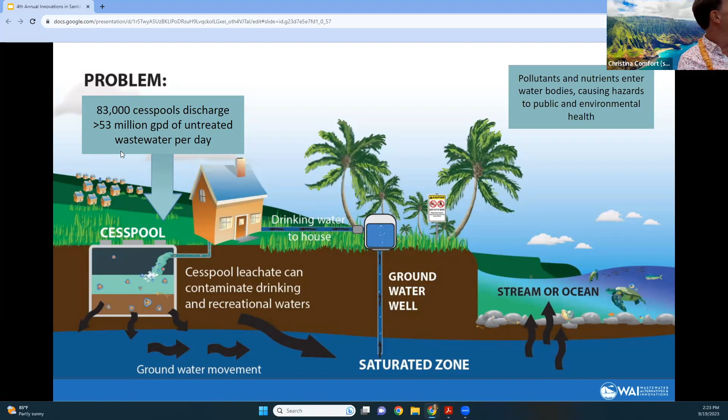I also want to thank Sina Pruder, head of the wastewater branch for Hawaii, and Ramzi Mansour, head of the Department of Environmental Management in Hawaii County on the Big Island, for being here today. We're just going to give a quick overview, I'll let Christina do this, of the priority areas and maps, so you know how pervasive this problem is.

Thanks, hi everyone. I'm just going to talk you through the cesspool ranking system on the 4 main islands. I'll show these different maps, and on each one you can see the outline of the island, with dots of different colors indicating where cesspools are located. Priority 1 is red, priority 2 is orange, and priority 3 is yellow.

These priority areas were determined based on a University of Hawaii study that included 14 different parameters, like environmental parameters, public use parameters, weather, and other factors. On Oahu, North Shore, Waimanalo on the southeast, and Waianae have some of the highest risk cesspool areas. Interestingly, even right here in Honolulu, where there's a sewer system, we have plenty of cesspools that still need to be converted.

In Kauai, there are about 14,300 cesspools, located all around the island in more rural areas. On the west side, Kekaha, Waimea, Wailua, Ha'ena, and Hanalei are the highest ranked in Kauai.

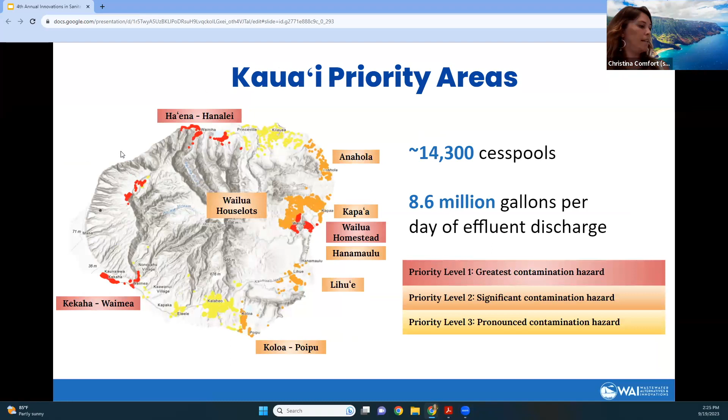In Hawaii Island, Puako, which some of you work directly in, many of you have heard about the sewage pollution issues there, those cesspools are ranked really highly. Also in Kailua Kona. Most of the Big Island is ranked as priority 3, but it's important to keep in mind that a lot of these cesspools are located really close to the coast and on volcanic rocks. So even if ranked priority 3, that doesn't mean they're not impacting the marine environment. Just based on the averaging, some really impactful and polluting cesspools might come out as priority 3.

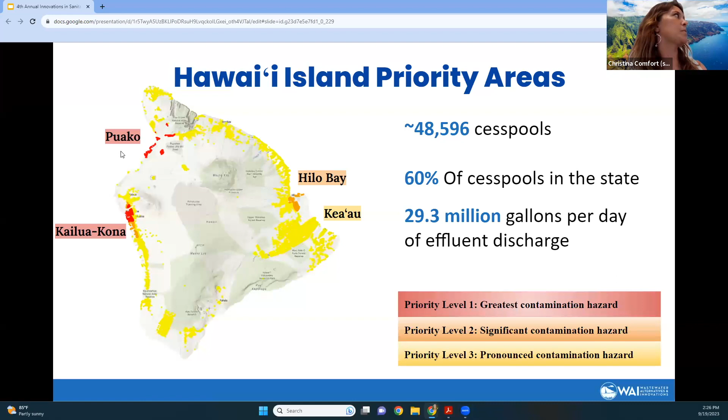And then for Maui, priority areas along West and South Maui are where most of the highest rated, or highest priority, cesspools are located.

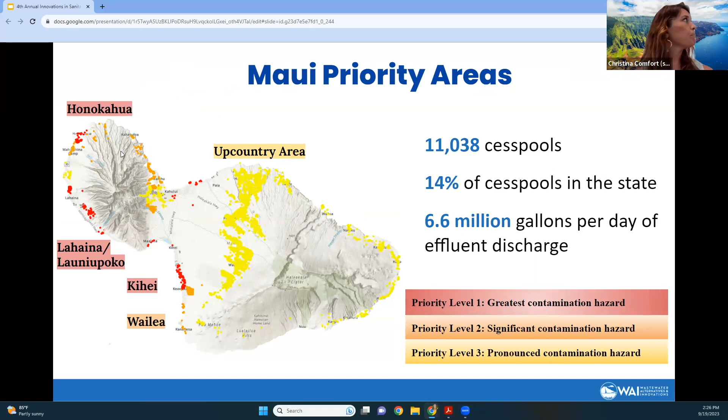Also, we don't want to forget about Molokai. It wasn't included in the analysis because it didn't have the same amount of data available to average out the cesspool priority and hazard risk. But just so you can see, these are where all the cesspools are located on Molokai, and you can imagine that most of those along the southern area, really close to the water, are going to have a high impact.

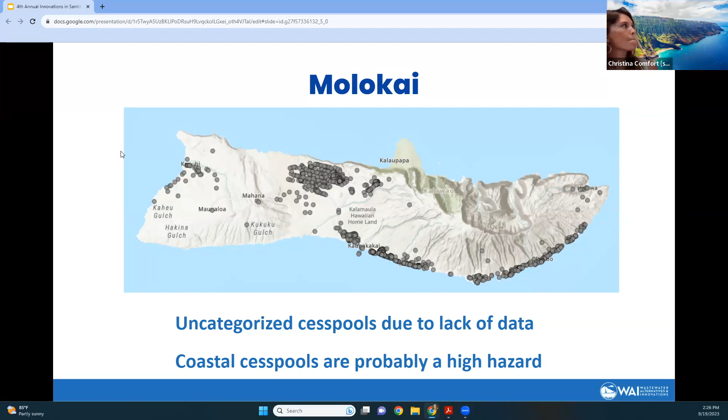As we move forward in our meeting today, I wanted to frame the conversation around the challenges and opportunities of wastewater management in Hawaii. On the challenges side, there's a lot to consider: environmental harm being done by cesspools, and in some areas septic systems, as well as aging sewer infrastructure.

The pollution from these systems can cause human health risks from encountering pathogens in nearshore water or, in some cases, drinking water. There are also low conversion rates currently, compared to our state mandate to convert all cesspools by 2050. Currently there's maybe 300 or so cesspools being converted per year, but to meet that mandate, that rate will have to increase about 10 times.

To move past that bottleneck, we need to think about the workforce bottleneck and the expense of conversions, and how this is all going to get financed, since a lot of homeowners can't afford the expense of these conversions. Finally, there's a need for better-than-septic solutions. It's become really apparent in other areas around the mainland that the standard septic system doesn't really do enough to reduce pollution, especially near a sensitive water body or coastal ecosystem.

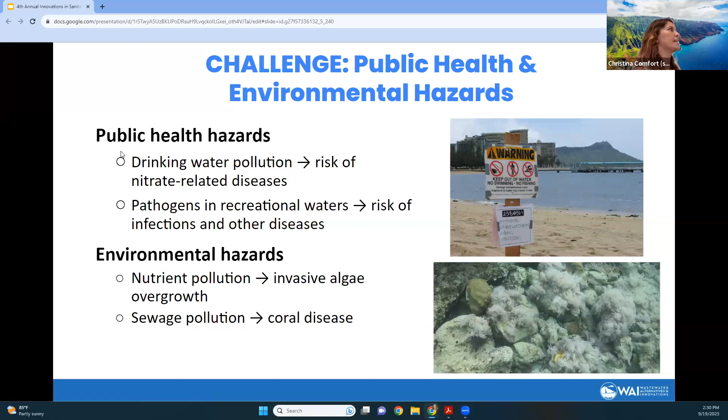But there's also environmental hazards, the nutrient pollution from poorly treated wastewater that's discharged into the groundwater can lead to invasive algae overgrowth on reefs. There's also all kinds of other things in sewage pollution besides nutrients that can be really harmful to corals. There's some evidence linking sewage pollution to coral disease increases as well.

So we're going to hear more about these environmental factors from our keynote speaker, Dr. Greg Asner, who's in the back. I'll let him share more about that towards the end, talking about West Hawaii reefs, climate change, wastewater pollution, and other important factors.

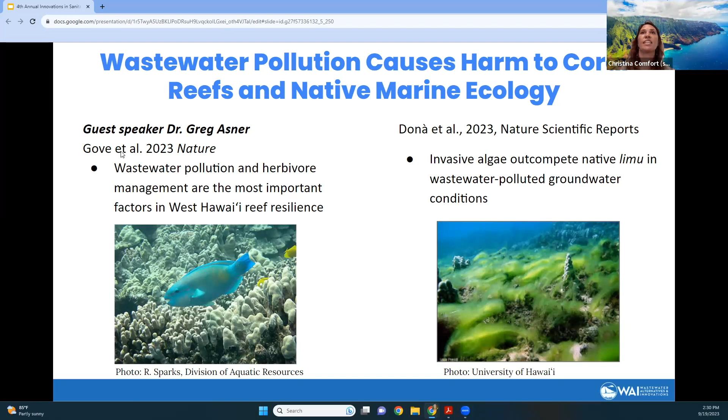I also wanted to share a new paper that came out recently showing how invasive algae versus native limu responds to wastewater-polluted groundwater. This paper showed that invasive algae really do better in wastewater pollution conditions than the native limu. So that's another important factor to consider.

On the cultural and recreational side, we have folks that engage in subsistence fishing, health of fish ponds, which are a brackish, enclosed environment really susceptible to land-based pollution impacts. Everyone who uses the water, swimmers, surfers, fishers, paddlers, a lot of us in this room, go out in the water. We want it to be clean. We want to be able to enjoy playing in the water, recreating, and fishing.

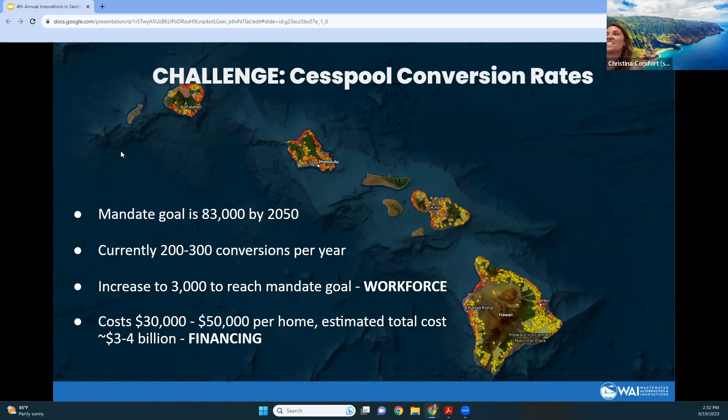We'll hear a little bit later from Gabby about the Workforce for Water program that's working on addressing the workforce development needed to make these conversions. And again, the financing is something that's a constant topic of conversation. Where's the money going to come from?

Septic systems don't adequately reduce pollution, especially when they're near sensitive water bodies. In areas with porous sandy soil or volcanic fractured rock, the effluent from septic systems in the leach field isn't treated to a very high standard, and it can quickly enter the groundwater and nearshore systems. So we're really interested in finding better-than-septic solutions and implementing those at the individual home scale.

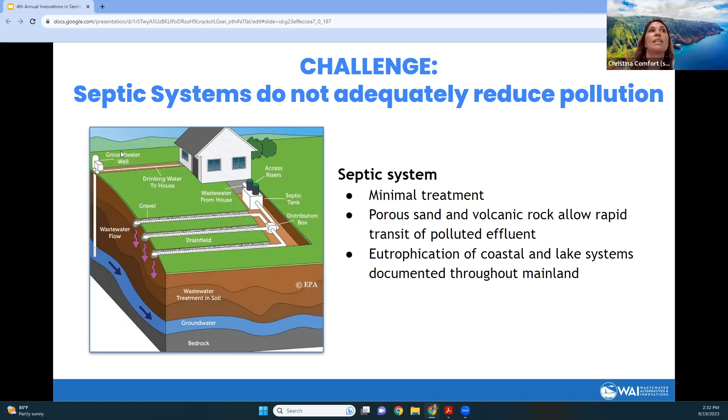This is some more detail about what a septic system does and does not do. Basically, septic systems do not remove all the nitrogen from wastewater, typically more in the 10 to 50% range, depending on what kind of soils surround the system. Whereas the technologies we're hoping to see implemented reduce nitrogen by at least 50%, and some of these technologies up to 80 or 90%. So that's really great.

So basically, there's a little bit of information here about the nitrification and denitrification processes that are needed to reduce nitrogen from wastewater into a harmless nitrogen gas. Septic systems don't do that. Some innovative technologies do, and that's what we're really hoping to bring to Hawaii.

And I'll pass it back over to Stuart to talk about legislative process. Thank you. So as you can see, we have made a lot of progress, and there are people in this room that I want to thank over the last really 7 years. Ted Bolin is the one who got me into this business about 13 years ago, so I have him to blame and thank at the same time. He was the Deputy Attorney General for the Department of Health.

Sina also has been working on these issues for years and years, and also served on the cesspool conversion working group with us. But we were able to pass Act 120 to ban new cesspools. We were the last state to do that by over 3.5 decades. And then we passed Act 125 to make sure that all of them are upgraded by 2050.

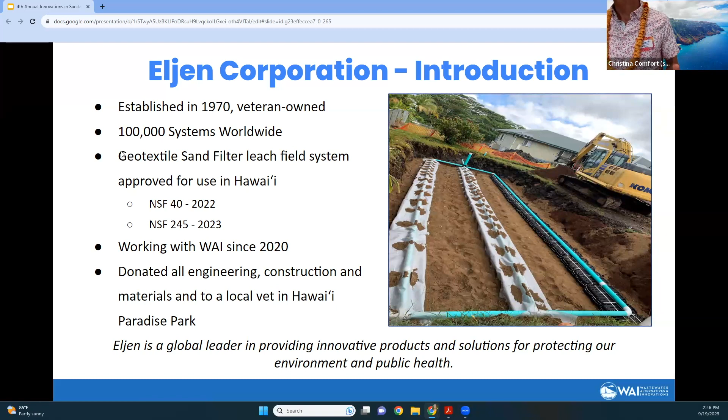So let's give a round of applause for Eljen and for Scott, who's going to talk to us more about the benefits of this system.

Right, Aaron? Straight out, yeah. It's on here too, it's pretty small. Should have brought my glasses in here with me. I'm gonna have to step to the side, I think.

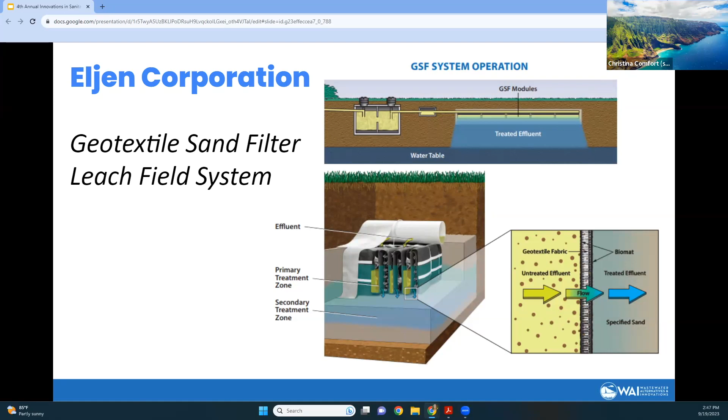There's a primary and secondary treatment -- see where the effluent enters at the top. Primary treatment in a standard system happens in your septic tank, but in the Eljen module, it takes place in the module itself. That's where we collect all the solids, and the sand polishes it off. When effluent passes through the module and 6 inches of sand, it looks like tap water and has no odor. By removing all the suspended solids, you won't clog the micro and macro pores in the native soil, which prolongs the long-term acceptance rate.

The primary treatment zone is made up of plastic cuspated core and non-woven geotextile fabric. The fabric is looped up and down over the core, as you can see in the picture -- it's one solid piece. In one A42 module, you have 65 square feet of fabric.

We use a specific sand -- ASTM C33, a washed concrete sand. It's washed because fine particles would otherwise work their way down through the coarser particles and clog the micro and macro pores in the native soil, slowing the effluent rate through the soil. The longer that soil stays wet, the more biomat builds up, and that's where you get a failure. So it's important to have that sand.

Even on stone and pipe systems, a lot of contractors complain that just trucking the stone, because it's vibrating, creates small particles -- fines -- that go down and clog the soil pores.

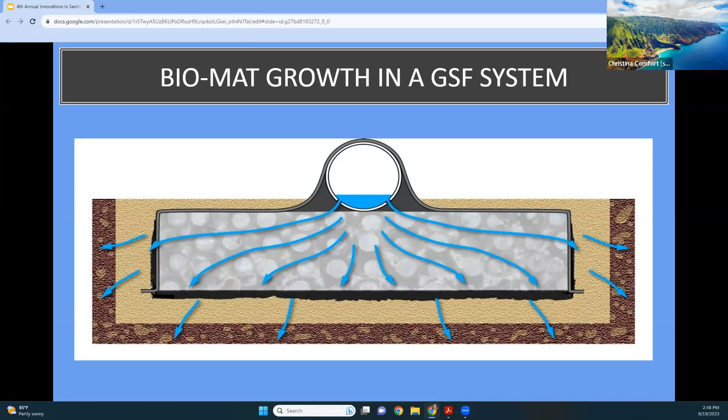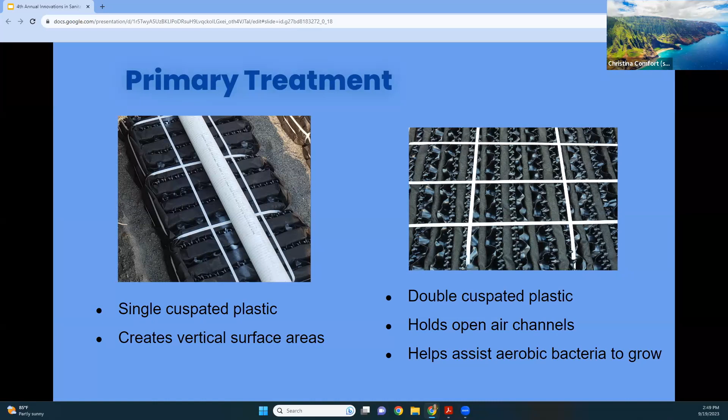Secondary treatment zone, I said, is the sand. Anything that makes it through the module is going to get caught up in the sand. We're going to grow some biomat. During our NSF 40 testing, we took the system apart, went and looked inside the sand. We had biomat buildup about 1/8 of an inch. We scraped that away, and underneath the sand looked pretty good.

NSF 40, we use 6 inches of sand below the module. NSF 245, which is at least 50% nitrogen reduction, is a little different. So our sand layer is now 18 inches, and our denitrification layer is 18 inches of sand and wood chip mixture. That's the lignocellulose material. So what happens is we need to have an anoxic zone in order to get denitrification.

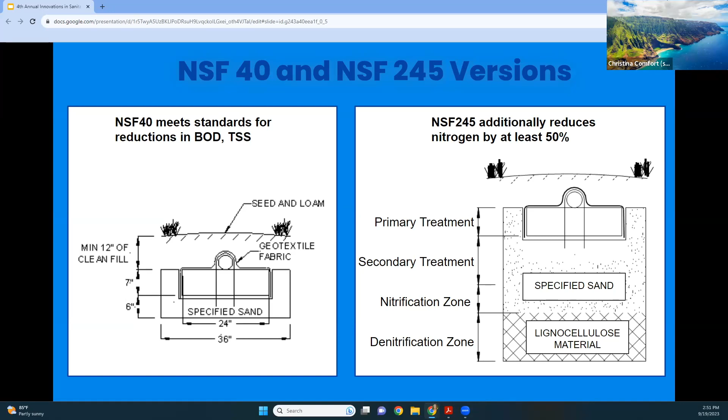Without getting too technical, you have the secondary treatment zone where you get your nitrification. You want to get 100% nitrification there. You need oxygen for that. But in order to get denitrification and have the nitrogen gas evaporate out, you can't have any oxygen. So that's why we go down to 18 inches there. That's the difference between those two systems. NSF 245 is a minimum of 50% denitrification.

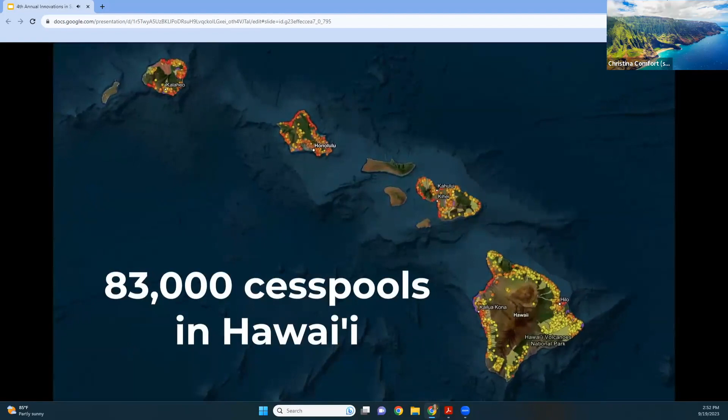My name is Stuart Poland, and I'm the co-founder and executive director of WAI, Wastewater Alternatives and Innovation. In Hawaiian culture, the word 'wai' is water, and in Hawaii, our water resources are threatened from contamination from cesspools and failing septic systems. The good news is that there are solutions.

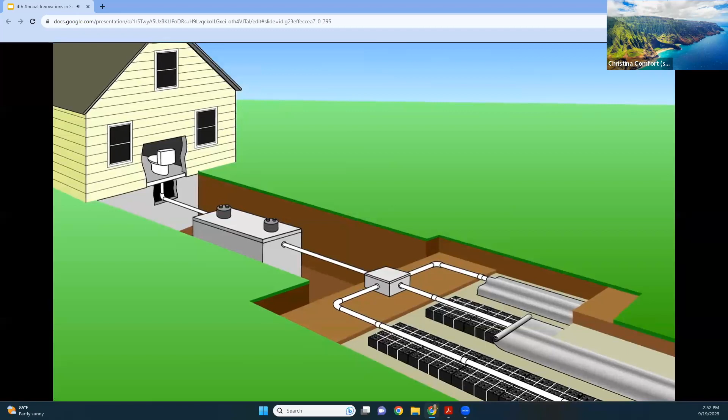The first step in converting your cesspool or failing septic system is to hire a wastewater engineer who will help design a replacement system. The engineer will design a septic system for your property, which includes a septic tank and a leach field that does denitrification, lowering the amount of nutrients like nitrogen and phosphorus that can contaminate coral reefs and hurt your business.

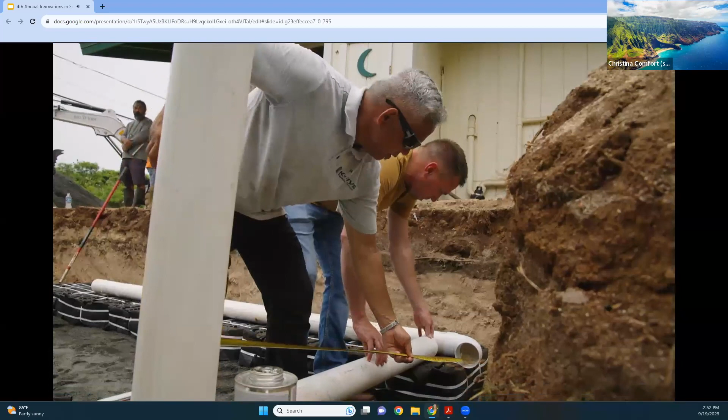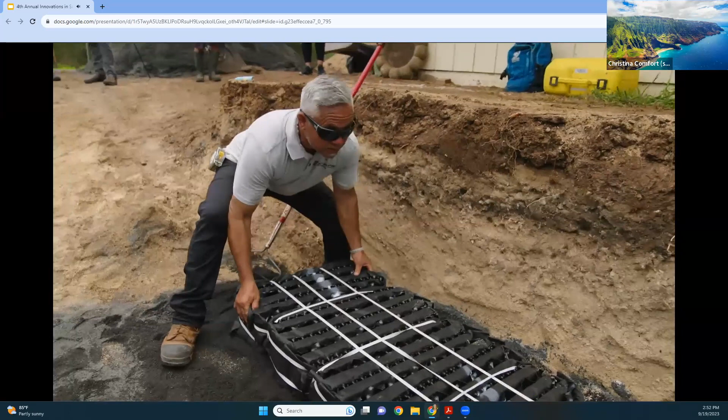The second step is to work with your engineer to find a contractor who can take out the old cesspool and put in a new septic system. The third step is to work with your engineer and the contractor to find the best system for your property, one that does denitrification. The homeowners here had a cesspool that had to be pumped out every single month at about $300 a pump. That adds up to about $3,600 a year.

And at that rate, they could have paid for the entire system in less than 10 years. Our corporation is proud of this continued relationship and partnership with WAI. WAI has helped not only our technology, but many technologies find a path into this great state of Hawaii. It is helping promote clean wastewater systems and removing cesspools.

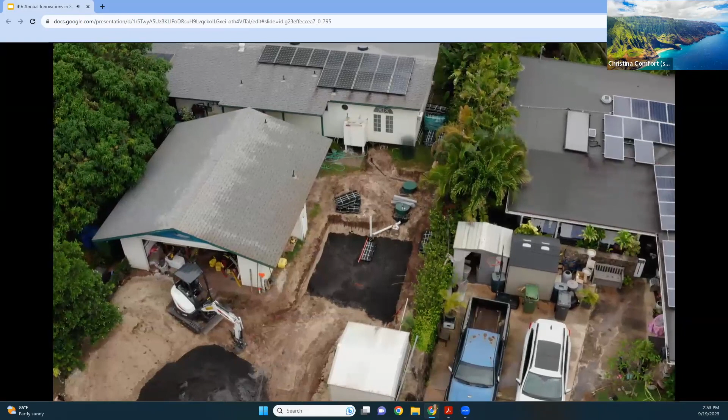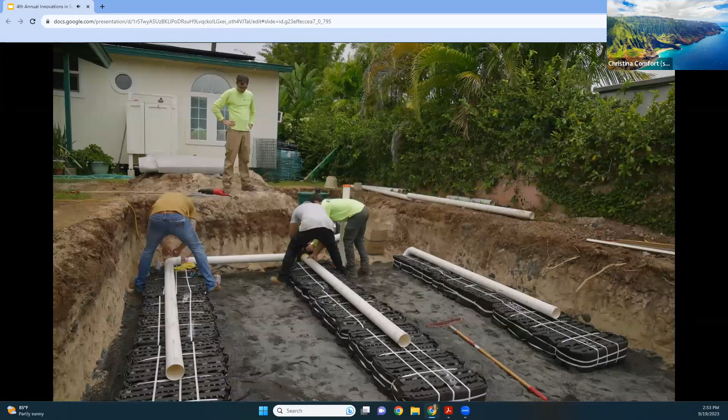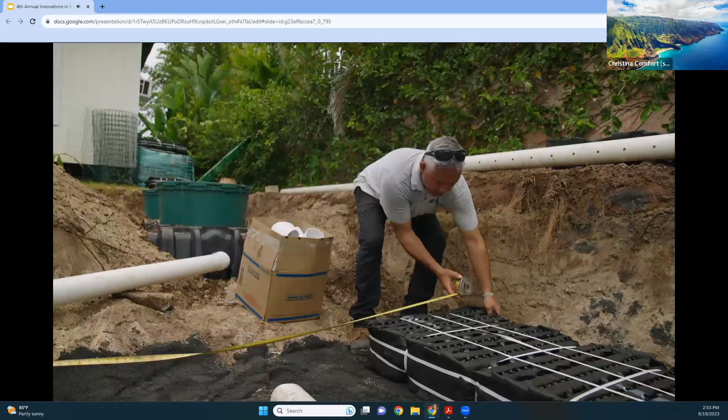It's passive, it doesn't require power, very little maintenance. It can replace aerobic treatment units in certain situations. We put out a product that's not just necessary for the environment, but cost effective. At half the size of the footprint, you can get into these residential homes and create a smaller leach field, which saves time and money for the homeowner.

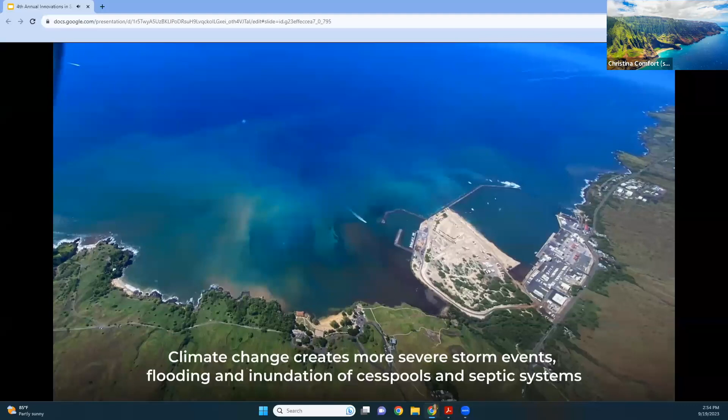Not only does Hawaii have the highest number of cesspools per capita in the country, but we were the last state to ban them, by more than 3.5 decades. But here's the good news: we have an opportunity right now, we're at a crossroads, to become a leader in sanitation across the country. And it is our job as stewards of the land and the ocean to protect our water quality and our water resources here. We don't have clean drinking water, nothing else really matters.

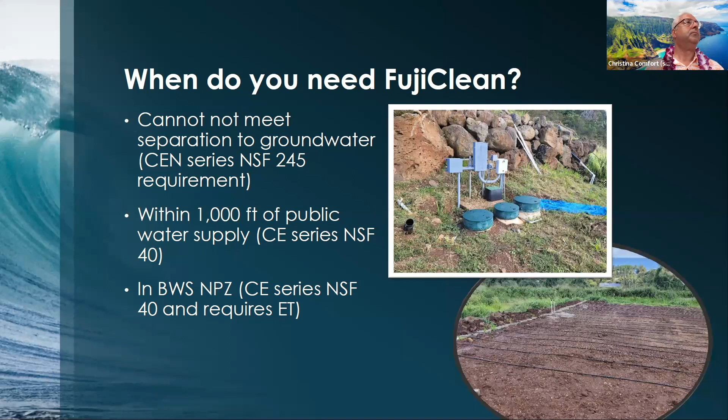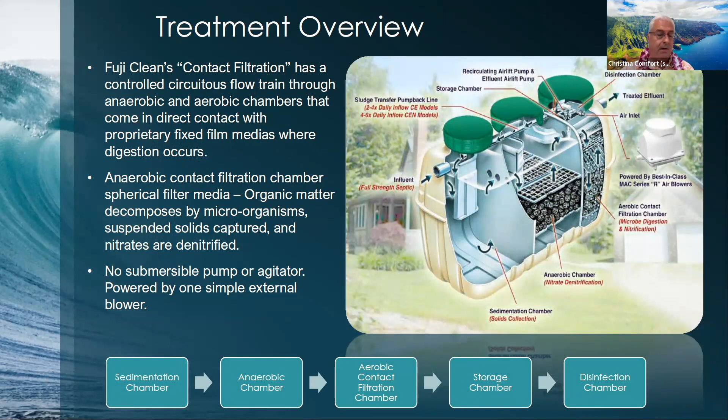These package plants basically have contact filtration. We go through an aerobic chamber, so we go through ammonification, nitrification, and denitrification. It's all the same chemistry similar to the Eljen, the biological process. So it goes through multiple chambers. It gets recirculated constantly throughout the day in order to accomplish that denitrification, which occurs in the anoxic zone, which is our middle chamber.

What's the average cost of your system compared to a traditional septic system? So our standard cost is going to depend a little bit on the size of the system and the quality of the soil and infiltration ability. I tell everyone we're basically anywhere from 10 to 15,000 incrementally different, and it's really just the difference in cost of the tank, because everything else is exactly the same. And then electric, we're very low draw. You can actually plug it into an outlet and be off and running.

We've got 1 minute left. Units have been deployed across the world. So since I've been involved with Fuji for the past 3.5 years, we're averaging 25 systems per year, so I'm just under 100 right now. And we're doing some commercial projects as well with our 6,000 gallon systems.

How fast can you produce large quantities? I met with Fuji, we flew out to Maine to our manufacturing facility. They can produce, I think, 8 a day in their manufacturing. So if we had a large scale project, we would set up an assembly facility here based on whatever is needed.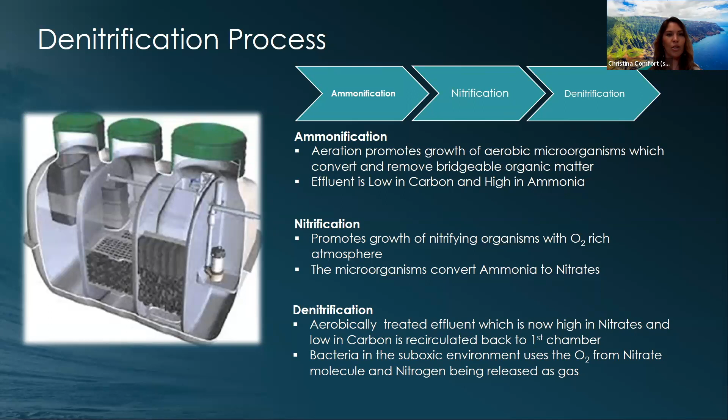Do you guys understand the difference between large capacity cesspools and regular cesspools? Most people do. Large capacity cesspools are usually affiliated with commercial businesses over 1,000 gallons per day, and they are regulated by the EPA. So when they came in to show you this conversion process, we're trying to convert cesspools. When the EPA came in with the large capacity cesspool regulations in 2005, they cracked the whip and were able to address thousands of large capacity cesspools, with fines to back it up. There are still a couple hundred large capacity cesspools across Hawaii.

What ASB did is they didn't realize one of their remote branches had a large capacity cesspool, and they were being fined for that. They were kind of like, we didn't even know it was there. The public can't use the restrooms, but if one customer uses it per year on an emergency basis, they said, okay, we'll have to convert this.

But what they did, and we hope this can be a model for the rest of the state, is they said, instead of us paying these fines and going back to the US government into the treasury where we don't know where that's going, can we use that money to help low-income homeowners convert their cesspools? And to the EPA's credit, they allowed it, and they went for it.

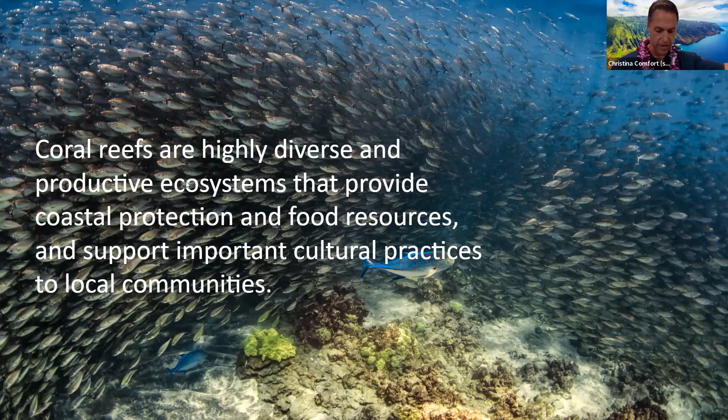The problems that we have are almost now becoming insurmountable in some areas on the Big Island. I will tell you from monitoring the entire state that there are areas we cannot address - they're just too far down the road. The Big Island is at what we call the land use transition, where the system is starting to teeter between sustainable and unsustainable conditions in certain spots. But we're not all the way there yet. So it's a very important place.

These are some of the drivers. 85% of people live within just a few miles of the ocean in Hawaii. Most human activities, development and infrastructure, are thus concentrated along shorelines, and land-based impacts - this is the punchline of the Nature paper - including runoff and wastewater and others that I'll mention to be holistic here, really are the most essential worries that we have as coral reef scientists.

I'm a coastal and coral reef scientist at a wastewater experts meeting. Kim beat me here by, I don't know, decades, but at least I'm here now.

This is that, and this is open access. We published it, paying the big bucks to publish it open access, so if I could put it on your website, you can do things with it. This is free to read.

The reason I put this up here is that it's critically important you understand this study covers only West Hawaii Island, and I'll talk about that in detail in a minute. The author list is pretty much the who's who of anyone working in this space. It was critical to us, and Jamie and Gareth are the real leaders here. I'm just the crusty guy in the background helping. But it was critical to the process to get the scientists on the same page to create an internationally high-ranking journal output that we all agreed on.

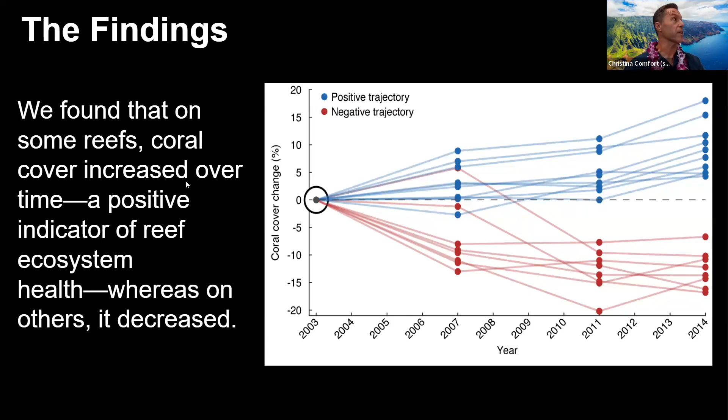But this was critical in our thinking: what is going on in these reefs? Why are some increasing in quality and some decreasing in quality prior to the first major climate event?

Jamie's team put together an amazing data set, compiled from a lot of the co-authors. It's field-calibrated, model-driven data. It's a complicated graph, but let me tour you through it a bit.

The first panel is West Hawaii Island, the area I'm talking about - 120 miles from Upolu Point in the north to Ka Lae, also known as South Point, in the south. The monitoring and this entire study focuses on that area, which is the largest contiguous tract of coral reef in the archipelago. It's the place that I know and love deeply - I know it like you know your favorite place on earth, and I still get choked up talking about it because it's such an incredible coastline. You may go to a resort, but you're seeing none of it. I get to work the entire region from the air and from sea, and it is absolutely epic, but also teetering in a lot of places along that coastline.

Now, what was mapped in this Nature paper, in this process? The second panel is human population, and you can see the yellows to the blues - the increase in human population largely centered around Kailua Kona, but zoomed way out. There are increases all over the place, and then different categories of what we thought about as possible reef stressors.

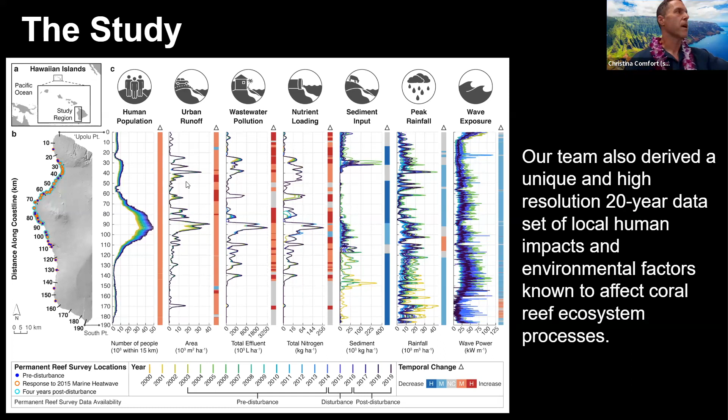Making a super long story short here, you have to read the paper—it's extremely detailed. This is kind of the pre-heat wave findings.

The graphic on the far right shows blue as increasing quality of the reefs, and red as decreasing quality of the reefs.

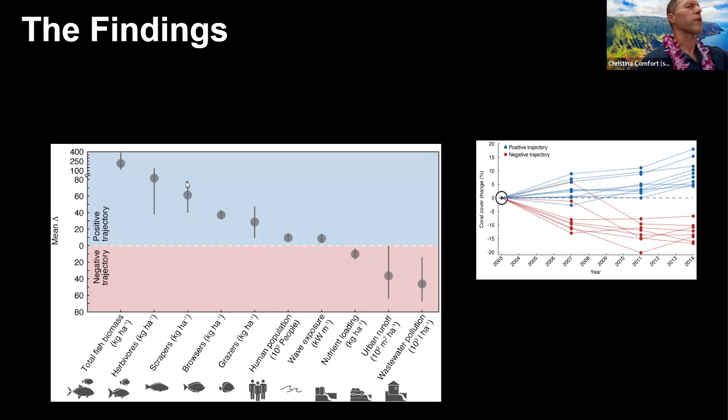Prior to the heat wave, with those model-driven data, we determined through statistical and geostatistical analysis that there were factors related to the improving reefs over time.

You can read them here. They largely had to do with fish management. Fish eat algae, and fish keep that substrate available for coral settlement.

I'm a coral settlement specialist, and yes, the corals do get very affected by how much macroalgae is on the seafloor. There is almost no more important factor than that.

Areas along the West Hawaii coastline that had high concentrations of different groups of fish that take care of this reef had improving reef over time.

Areas in red that had decreasing reef quality were geostatistically, highly significantly related to nutrient loading, urban runoff, and wastewater pollution.

This was the most sort of arresting set of results that we had in the process—arresting for all of us. We had been trying to figure this out, but the data were so clear this time that it came out in a very clear statistical sense.

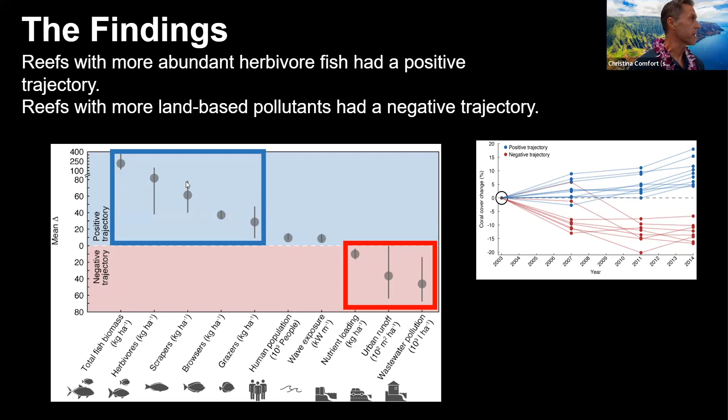I'll get back to that in a minute.

Then the data passed through the first heat wave, and you can read that for yourself. Ocean temperatures are increasing, marine heat waves are becoming more common, rainfall is decreasing, but the peaks are becoming more extreme when it rains and pours. In other words, there's Hawaii.

This is kind of the evolution of the heat wave in 2015. You see three hot bands in the Pacific. Who was here in 2015? It was really hot—I literally would see tourists jump in the water and jump back out, it's that hot, very literally.

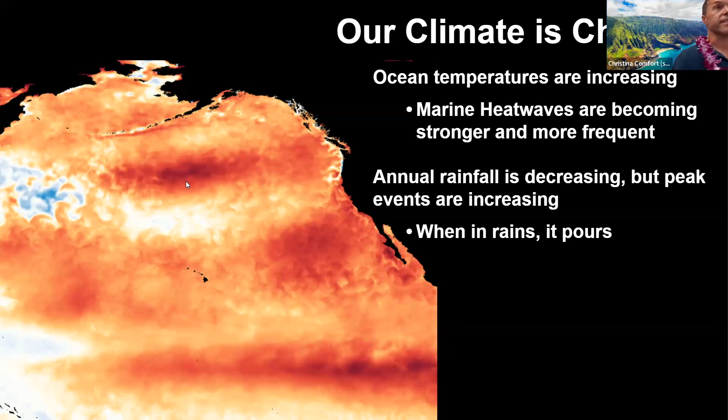Just so you know, since then we've had one other heat wave. It was about half as long, but actually a little hotter, in 2019. I was very involved in that, but I'm not talking about that today.

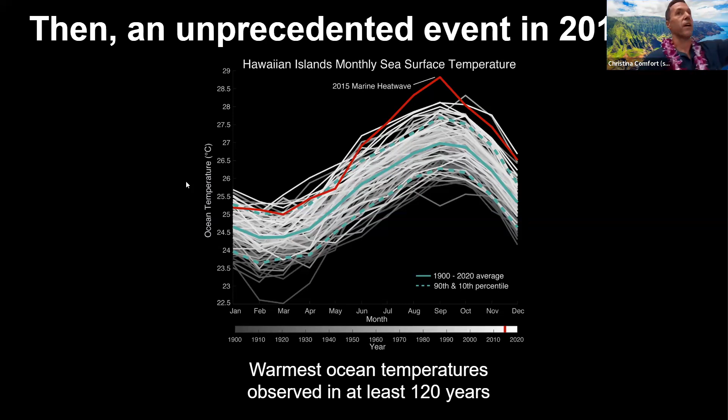It took corals out of their comfort zone too. At the time, we were talking about marine heat waves killing coral, and what we didn't think about was the compounding effects. That's what the next part of this story is about.

This is a little bit complicated—I'm a scientist, so bear with me. I think this is the end of the science part.

The reefs that we were monitoring through time had a certain amount of coral just before the heat wave hit, and that's shown here. This is 2014, 2015—these are all the reefs we're monitoring, and this is the coral cover at the moment just before the heat arrived. Some reefs were already low, some were very high in coral cover. There was just a lot of variability, right? And I told you all about that—wastewater, herbivore fish, that was all really important in leading up to this moment.

Then the heat wave came, and we had this crazy set of responses in these reefs. You can read it up there—max coral cover loss. We lost nearly 50% of our coral in some places. It is not true that we lost 50% of our coral overall.

People say the press titrates facts down to the minimum. But there were places where we lost half. A quarter of the reefs had 20% or more coral mortality.

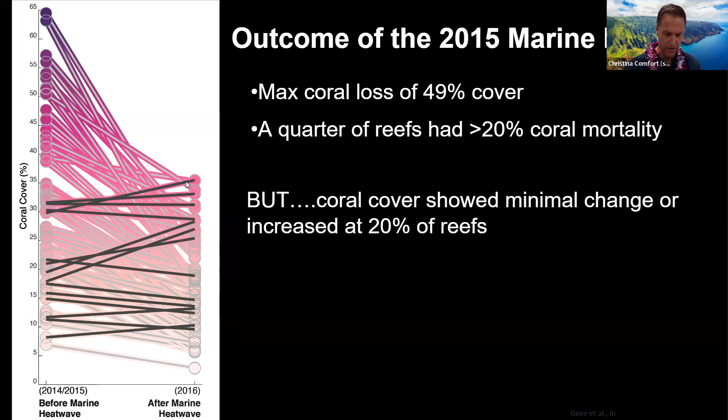But what was amazing is that about 20% of the reefs didn't decline or actually improved through the heat wave. So everyone, the authors, are scratching their heads trying to figure out what is it that caused that sort of positive response.

What we found, to make a long story short, is that reefs with the highest fish populations and the lowest levels of land-based pollution made it through the heat wave the best. I just summarized a massive amount of a complicated story. Kim has probably gone, how did he try to do that? All in one slide.

This is really detailed in the report. I don't want to bore you with the details, but honestly this was so enlightening for us. We said, wow, if we can keep our reef water clean and full of fish, we're going to be able to squeeze these reefs through these repeated heat waves.

The way I try to explain it to people is take an hourglass. Everyone know what an hourglass is? Turn it on its side, and now the hourglass is a pinch. We have got to clean up these waters, and we've got to keep these fish populations high to be grazing these reefs in order to get them through this pinch of these heat waves. That is the only way forward.

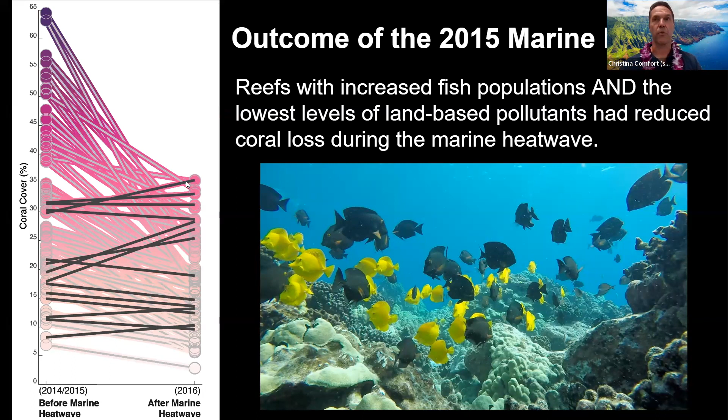That's what that says.

The response to this has been pretty great. On the DLNR side, that's the state agency that has jurisdiction over reefs. The Division of Aquatic Resources is within DLNR. If you're not from here, there's been campaign after campaign after effort to try to work with communities and the mentality of our fishing communities to try to increase our herbivore fishes on these reefs. I talked about why that's so important.

The grazing to battle down that algae is very important. So they've been doing their job. They're struggling to get it done because there's a lot of dissent over this, but it is a thing, and I wanted to be holistic in the presentation.

The need comes from this group. I cannot tell you how important we all think you all are, because those are the geospatial data sets that show us where our on-site sewage disposal systems, OSDS systems, are, and our field calibrated model-based effluent estimates. You see hotspots. It's not just where the cesspool conversion prioritization is. No way. That had Puako and Kailua Kona, but I live in South Kona and those hotspots down south.

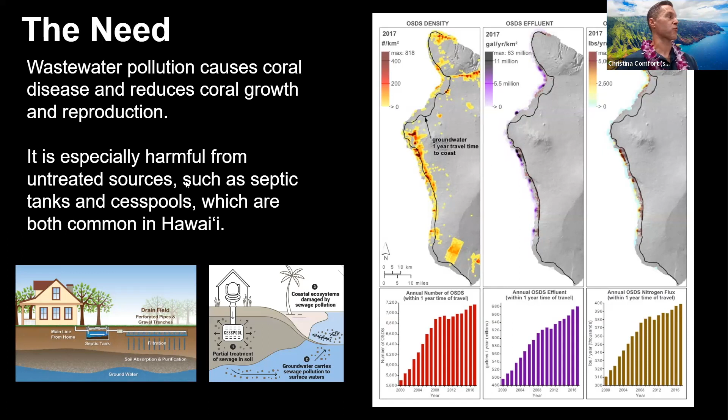Some of you visited me yesterday and you saw why. It's all cracked rock down there. There's no soil, hardcore down there, I think. And so I am a strong proponent of solutions to both cesspools and septic tanks.

I do want to take you home to my home, to a place that keeps me working every day 30 years later. I think I'm getting more energetic as I go, because the need is so great. The South Kona district in this red box of Hawaii County is a very special place because it's still environmentally quite epic, but it's got these issues as population continues to expand to the south.

If you travel through that area and wonder what's around you, it's a little hard to see from the back of the room. There are green areas of conservation land, but look how few of them touch the ocean. That big green wedge is state DLNR land. It doesn't touch the ocean, okay? A lot of it doesn't touch the ocean, and you can see all that stippling in there, associated with subdivisions and growth. So, yeah, we need wastewater treatment in the region.

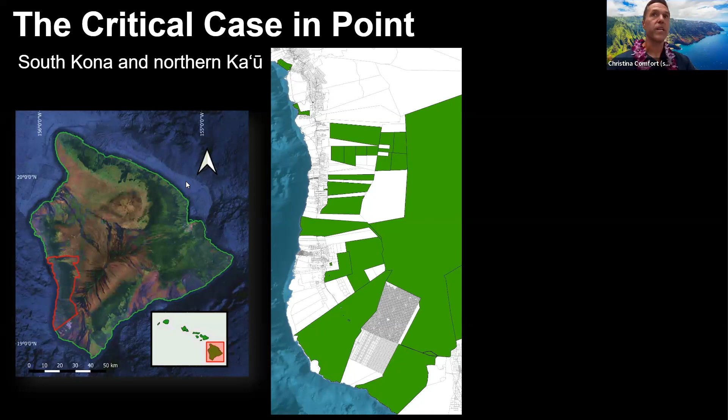What's really ironic is that the southern part of this district - in August 2022, Governor David Ige, the chair of DLNR, and everyone, after a decade of effort, finally put into place the state's largest marine managed area for the main islands: 19 miles of coastline. It's co-managed by Hawaiian cultural leaders and DLNR, called a CBSFA, Community-Based Subsistence Fishing Area. Terrible acronym, but it's the pathway forward for managing reefs because it allows communities to work with the government on effective management solutions that help our reefs, at least from a fishing point of view.

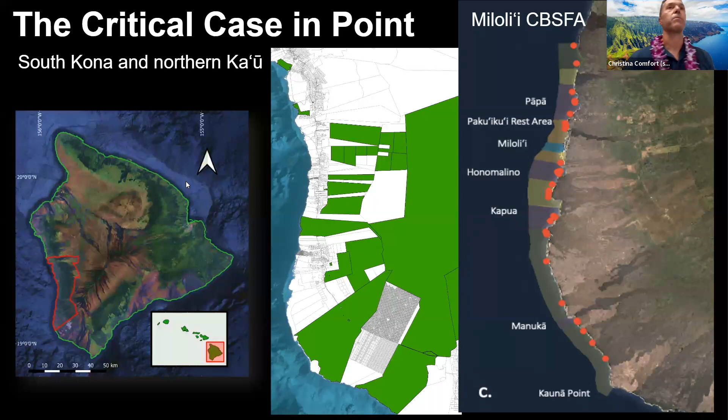Ironically, this is the area where there's an explosion of development. If you think South Kona is a rural place, you haven't lived my life—it's wildly developing. When I started, there were 3 languages spoken, and I'm publishing a whole history of South Kona right now. There are 13 languages spoken now. It's not the place you may have thought it was if you haven't been there in a while. It's really developing, and these issues are ironic because they're against a community-based subsistence fishing area of epic proportion that took a decade for our Hawaiian practitioners to establish.

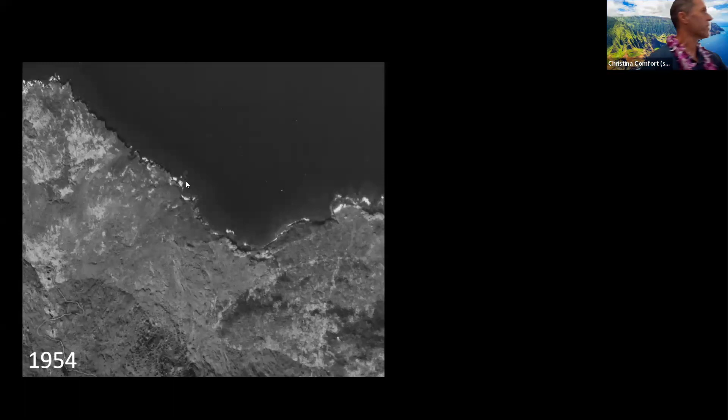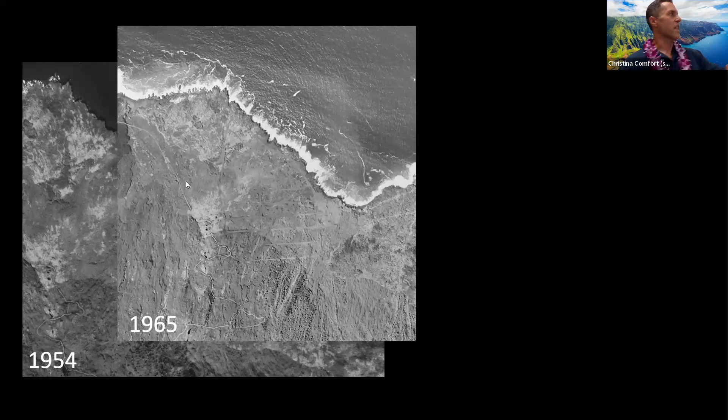Here's this place in 1954, before statehood—just before I was born. You can see this area that's near and dear to me; I'm using this as a case study. By '65, we had just become a state in '59, and all these subdivisions were put in. You see dirt roads in thermal imagery in '92, houses by 2001. Nowadays, my aircraft system uses AI-based methods for mapping in 3D where all the homes, sheds, and everything are routinely tracked. And there's that one subdivision.

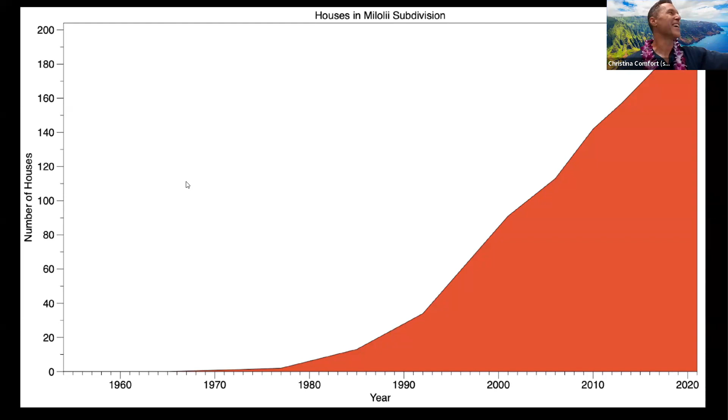That's what we can expect, and I'm not saying that's bad. I'm saying that's bad if the wastewater is not being treated properly. I'm all for the housing, but not with this flowing into the reef that just got the most important culturally based marine managed program behind it after a decade of effort.

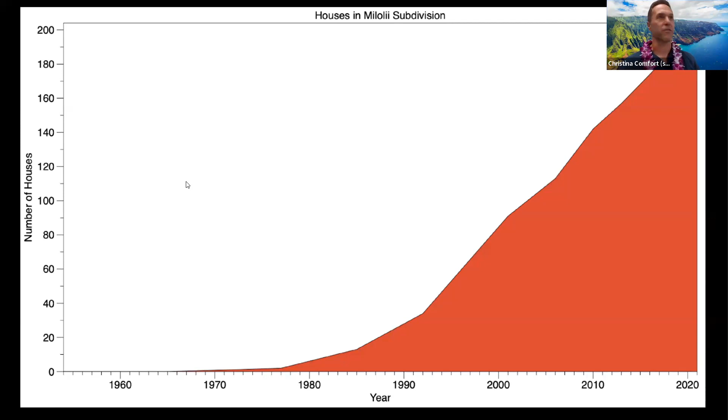So I think these are the issues. We're always saying that land-sea connections are deeply rooted in Hawaiian resource knowledge. That is true—I could start speaking to that, but I don't have time. The way our government is working, and I was talking to Ramsey, who I really like talking to because he's in the middle of this too, is: how do we get state, county, and other jurisdictions to work across these boundaries in a solution space that's going to benefit the people along this reef.

That's what that says. Our findings from the Nature paper, which I really did just gloss over because I'm between you guys and your happy hour and a few other times, are wicked clear, actionable, litigatable: these issues have to be addressed, both on the ocean side of management and on the coastal land side of management.

I'm going to end with this slide, and tell you what's been announced. I have committed $25 million to West Hawaii, already done myself. We're putting in this new program in West Hawaii. It's not just about planting coral—it's about changing how we're doing our work together between government, cultural leaders, community, and science. It's called Akoakoa, a name I learned through my cultural advisors where I live. It's got a dual meaning in the Hawaiian language: to assemble people, and for coral polyps to assemble on the seafloor as coral colonies. Literally, that is the word.

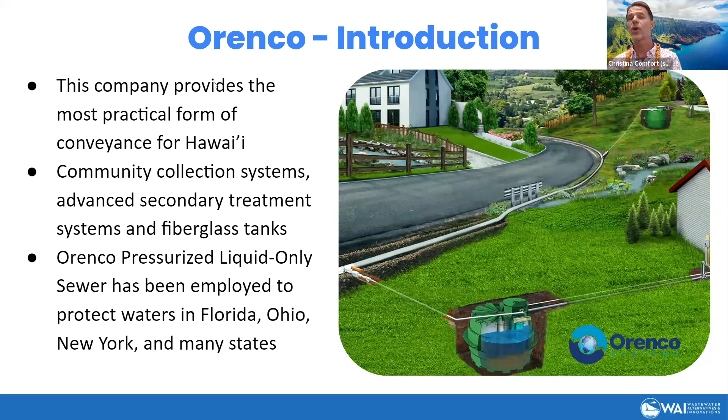So let's give a big round of applause to Mike Saunders, who has flown in from the East Coast and has had a lot going on. When we ask for studies, like we're going to look at this community, it's 6 hours ahead, it's at night, and Mike is churning out these reports for us in no time whatsoever. So we deeply appreciate all the work you guys and Bill have put into it. Jeff, the owner, was going to be here, but he got sick right before the trip and couldn't make it. But let's give a big round of applause for Mike.

Thank you, Stuart. So kind of interesting, Orenco water - one of the things people don't realize, because we get framed as this new technology or something that's just coming to being - kind of interesting fact, we've been around for 42 years, and we've grown from 2 founders that started a company in their garage to 460 employees today.

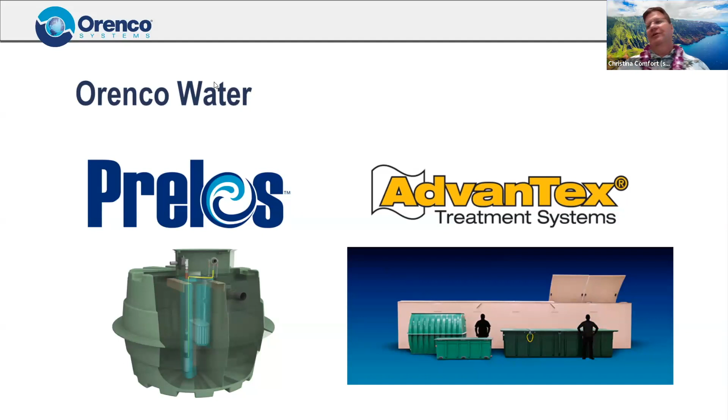What's interesting about Orenco, and why I like it, as Stuart said, we're a 2nd-generation family company. We're going to talk about products like Prelos and Advantex today, but we're a solution-based company. Most of our people are engineers. It's kind of funny - the products all came by default, and really our core value is clean water and trying to find solutions. So it's an interesting place to work. We're based in Southern Oregon, but we sell our products nationally and internationally. We have a large presence in New Zealand, Australia, Greece, and other places. Really what we're known for is scalable solutions. Hopefully you see that today.

You've heard the word decentralized already, so I'll explain that a little bit and how we fit into that. We are the industry leader - we were doing decentralized, I think, before we knew it was decentralized and before the name came out. You also hear it called distributed. But anyway, that's what we'll talk about. What we've tried to focus on is passive scalable solutions - low energy, low operator oversight is really our theme. We do everything all the way from a single family home up through complete community solutions. The other thing we call 'one-offs' - stuff that's off the grid that needs a more advanced treatment solution. I really think we're the only company that scales like that, so you'll probably see that in a second. And you've heard clusters talked about - I'll explain that, and decentralized.

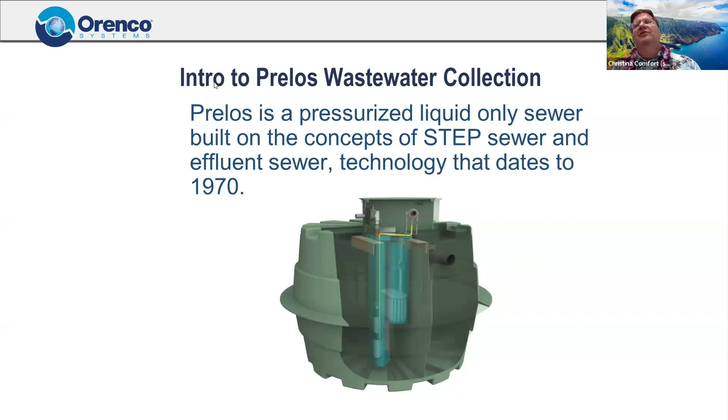So Prelos, it's kind of interesting - we've been doing this since the early 80s. The technology existed since the 70s in Florida. We did not call it Prelos till about 4 or 5 years ago. So this gets a little confusing - you'll hear it referred to as STEP, septic tank effluent pump systems. At Orenco, we started to cringe when we hear the word STEP because people hear septic tank and get the wrong idea. So for years we called it effluent sewer, and more recently we call it liquid-only sewer. That's where Prelos came to being - it's pressurized liquid-only sewer. So that's the logic behind the name.

The concept's pretty simple, and actually everything we do at Orenco is based on this concept: we intercept the flow basically at the source. Unfortunately, here's where the name septic tank comes into place - we do what a septic tank does, we just do it in a more robust fashion. If we intercept that flow and keep the wastewater there long enough, we get free primary treatment - solids settle to the bottom of the tank, scum goes to the top, and we take the wastewater from the middle and take it somewhere else. We can provide that treatment local to that tank, in a cluster at a community system, or send it to a centralized plant. We can do all kinds of stuff with it because without solids in it, it's easier to treat and easier to move.

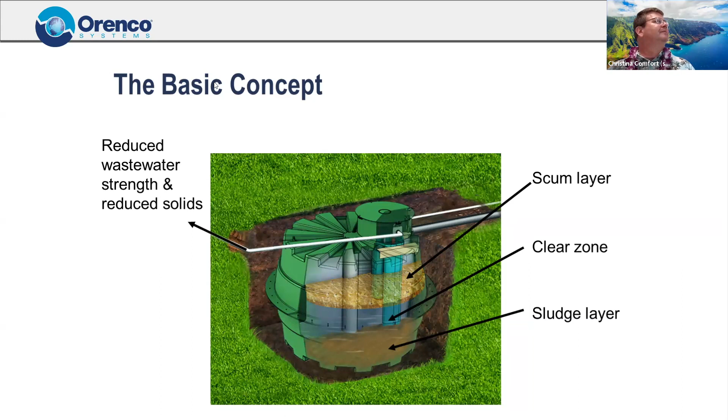So when we put it in a collection system, what you'll see here is it's discharging from this unit at the property and going out to a small diameter pressure main. When we try to apply this in the real world, this is the biggest factor. When you think about wastewater treatment, most people are familiar with lift stations, gravity sewer, deep pipes and manholes. Typically, this pipe is a 2-inch diameter pipe and shallow bury.

When we get asked, well, how deep is it? Usually we put it about 3 feet deep just to protect it. But the reality is in Hawaii, that's probably not even practical. So we can shallow it up, and if we need to, we can armor it. Really, if you're in rock and you just want to put it a foot down, you put it a foot down and probably armor it with some concrete and you're good to go.

The other thing that's really interesting about this is because the solids are at the source, this behaves like a water main. That means that we can flow in any direction. We can flow huge distances, and we have systems going 10 miles to an existing treatment plant. It sounds a little oddball, but the service line, if we had to go up walls and along walls, we can do that. Again, there's no solids to settle and collect anywhere. So this is the power of this.

We joke about it, we actually have one of our slogans, the power of Prelos. It's because we don't have solids to move, and it just makes it really easy. I can have treatment behind the fence there in that location. I could have another treatment plant five miles down the road, and they can be interconnected. I can pull off and reuse it there. I can go the other direction if I need to for part of it. It's kind of cool.

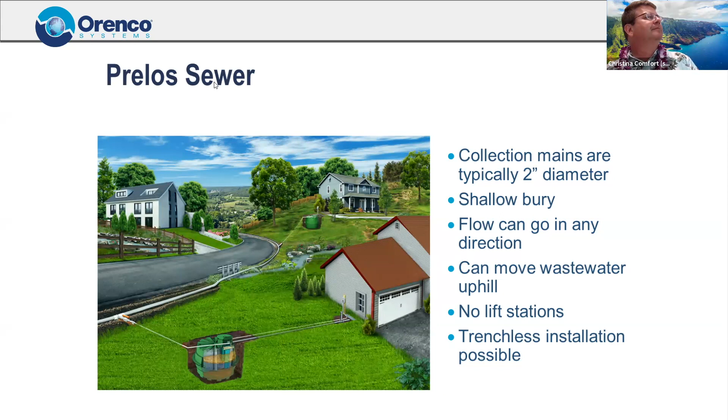Really the concept would be is where there's a cesspool, we would install this next to the cesspool. And like I said, that discharge line from there, if it has to go up a wall and along a wall, it can. Basically manifold them all together and take them somewhere off property to treat. So we're talking about the difficulty sometimes of disposing on property. You don't have space to do a drain field. You may be too close to the ocean. Well, this thing's pretty powerful. We can move it miles from the ocean if we have to, if that makes sense.

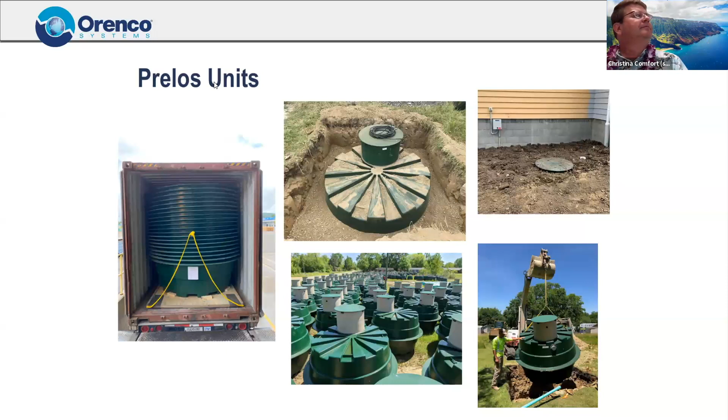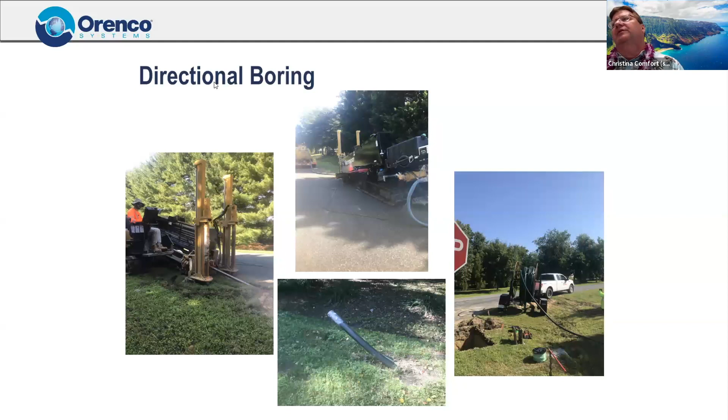The other thing is kind of slick. Obviously, rock will be a little challenging, but if you haven't seen directional boring, I describe it as basically boring a well horizontally. You can steer it up, down, around. What's neat about that is we can avoid soil disturbance too. So another added benefit of this type of approach.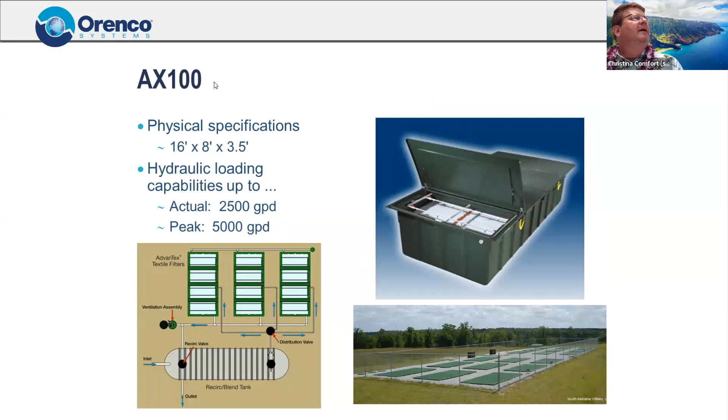These are 2,500 gallon pods. A bigger version is a 7,500 gallon pod. The key here is simplicity again. It's a very passive, natural process, kind of built on the concept of a sand filter. All it has is pumps. There's no headworks, there's no open tanks. It can be built above ground. Again, you can see the concept that we have as many pods as we need to get to our capacity in that upper right-hand side.

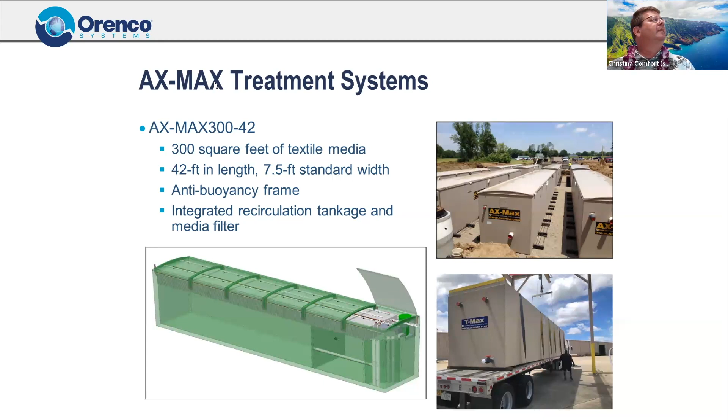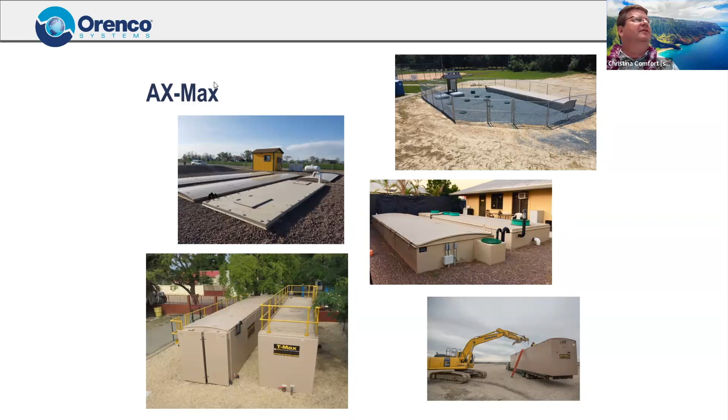I know there were numbers floated around of $100,000 to $300,000 to put in conventional sewers. Well, a 2-inch pipe costs about $3 to $4 a foot, plus whatever the cost is to install it. Still big numbers - I saw numbers of $100 to $120 to directional bore - but nonetheless, a lot cheaper than conventional types.

The nice thing too is that unit I talked about, the Prelos unit, that's a deferred cost till you actually connect somebody. So you can plan these, phase them a little differently. You can take hotspots offline first, if you know there's a lot of cesspools, and maybe not take other areas off service. You can also bring in on-site systems that mirror the same technology - if it doesn't make sense to run lines now, you can do that approach later and then run lines later. If I want to eventually tie in other treatments, I can add more homes and add another decentralized plant. So there's this decentralized or distributed approach.

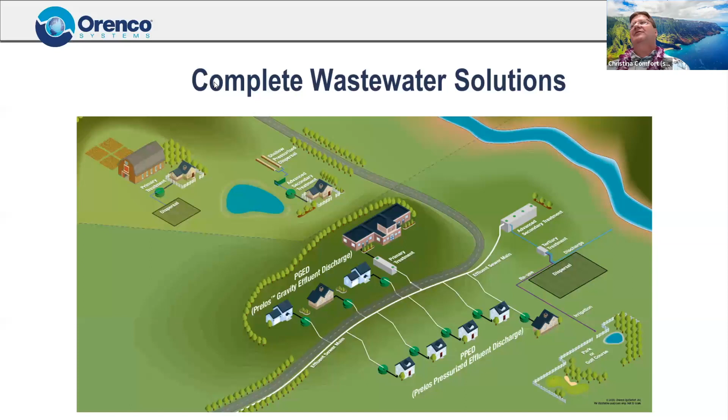So we went out to Milolii yesterday. This is kind of an interesting system for us, and I will say it's really been interesting going around the various communities, because we're a solutions company - every time we look at something, we really see the challenge in it.

Obviously the things that jump out at you there are the topography - it's 1,200 feet from bottom to top. The right-of-ways are pretty tight. The other thing that's really striking is that the build-out density is relatively low and spread out. Then you start thinking, well, where do I put treatment? Should it be at the bottom of the hill? Disposal - you run downhill, you're getting close to the ocean. As we were driving out, we noticed there was a lot of agriculture actually at the top.

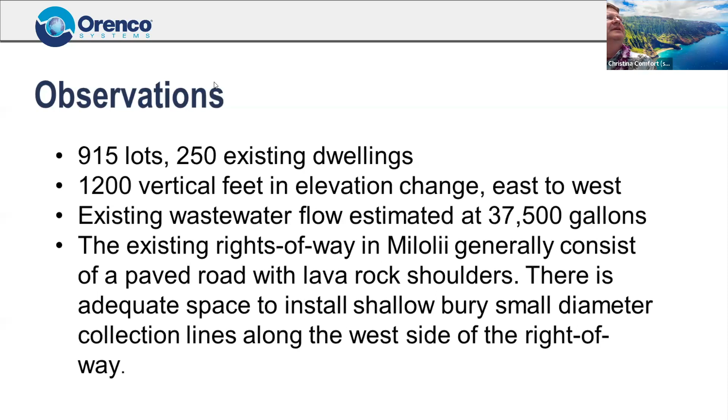We were kind of going, this may make sense to bring it up the hill - if the ag industry can use it up there and put it on some trees, maybe that makes some sense. So the big takeaway here is, well, what does this look like? It's about 915 lots, 250 existing dwellings, and as I said, it's got some challenges with it.

If you want to put the treatment plant at the bottom, hydraulically we can do that, and it would actually be mostly gravity at the bottom. We're also toying with the concept of maybe going uphill and having distributed treatment plants going up the hill. We talked about fire protection - we could actually stagger tanks going up the hill instead of just disposing of the treated water, put it into tanks so there's a supply for fire protection at various points going up the hill. Then anything that doesn't land in the tanks ends up at the ag industry at the top of the hill.

The reason I say all this is that it really is a tool in a toolbox. As creative as you can get from the engineering side, you start deciding what you want to see in this project, and you can actually see this as a tool where you can accommodate those concepts.

So just to frame costs, and I hate giving out costs, but I do this because this is, to me, one of those things that gets as challenging as it gets.

We've always championed this at Orenco: the first thing is just get the collection lines in. You're going to get past these really massive numbers, get it in, because those on-site units, that's where you have a lot of flexibility.

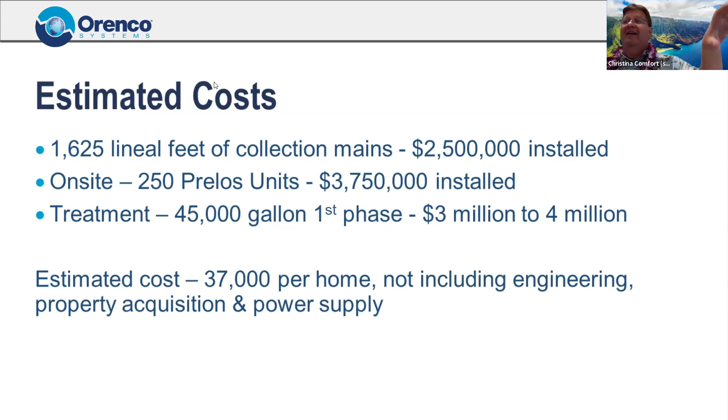On the treatment side, we're talking about decentralized treatment. If it makes sense to put a more advanced system at the bottom of the hill, that's in play too, because these systems will actually benefit other treatment processes as well, since you already have primary treatment.

Somebody had asked earlier about case studies and everything. If you want to write down this website, there's a ton of information there - case studies from all over the country, all over the world, on projects that aren't exactly like this one, but it gives you an idea of that concept of a tool in the toolbox and what you can do.

And with that, I'll wrap things up. I know I talk fast because I was worried I was going to get in trouble, but all right.

We're very excited after going to Milolii and actually starting to go to that next step. We got a grant to do a preliminary engineering report. Heather Kimball, the chair of the county council, was there and really thinks this could be a great model.

So, who's paying for it? The question is who's paying for this - it's open for bid, it's an open check right now, so if anybody wants to chip in, we're taking donations. Right now, for the preliminary engineering report, we just got a grant from Dig Deep to do that.

And then we applied for another grant to begin the process and all the data collecting that Erica knows so well from Coral, for doing the preliminary work for the EIS, the community outreach, the fiscal impact statements, and things like that. So hopefully we will get that grant and then we will pay for the whole system.

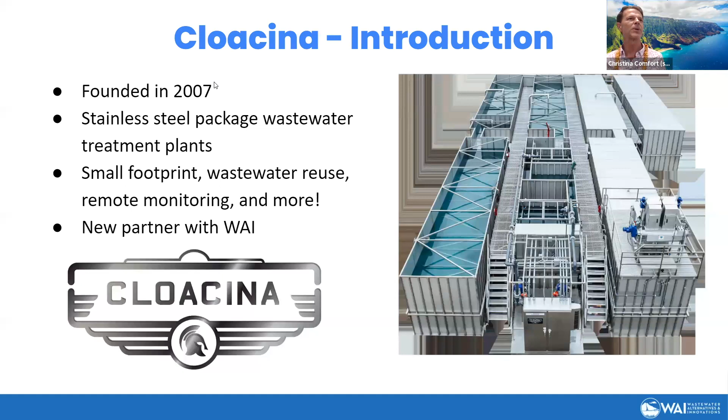That's what we're really pushing for. And they're stainless steel, and we need that in Hawaii. This has been a company we've been interested in for a year and a half, and we finally set up this partnership because we believe in this model for decentralized systems around Hawaii that are not going to ever be sewered by the city and counties, and that can offer a high level of treatment and reuse the water. We have a very exciting case study to share after this about what we're doing in Maalaea.

So please welcome, if you could, our guest speaker today, Chris Nally.

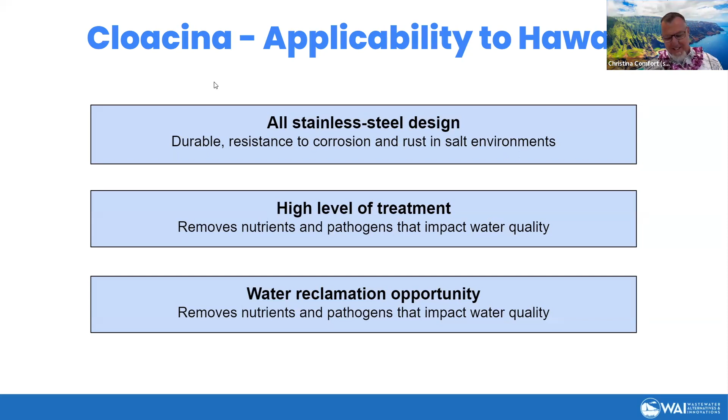So, just to be clear, I'm between these people and drinks and appetizers. Okay, okay, all right, let's make sure.

As Stuart said, we're a family-owned business. We started in the operations and maintenance world. I'm a licensed wastewater operator, have been for 30 years. I've been chief plant operator of hundreds of systems in a variety of environments and installations, from very small to entire cities. I've operated as a consulting operator to solve failing systems, or stepped in to train and support staffing. So we started and continue to operate Fluid Resource Management.

Cloacina is our manufacturing arm. We've grown very quickly in the last 10 years. We've taken an old methodology and package treatment systems on site, and we've invested many dollars of our own into developing a municipal grade, pre-engineered system where we can do flows between 25,000 gallons a day and 500,000 gallons a day.

We're also moving into the rental market, which we see as very important because there's a lot of systems that are failing and they can't get to the solutions quickly. So we're developing a rental division to either bridge a gap on a failing system or for emergency response, like fires, floods, earthquakes, etc. That's new to our product line, and we'll be shipping out or delivering the first units in Q1.

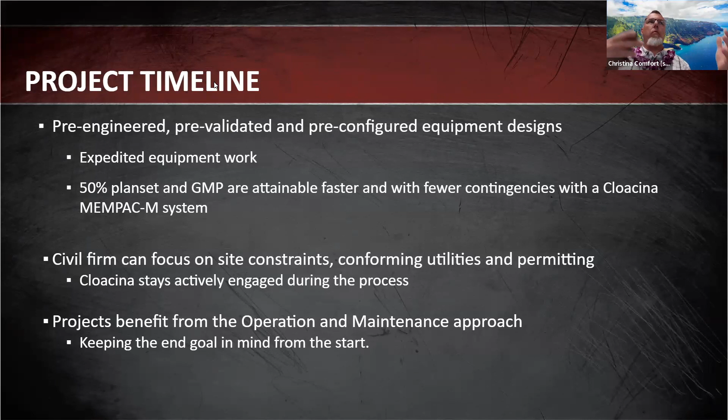And that's the benefit of an MBR: low power, low footprint, high quality effluent, and the ability to remotely evaluate the system, as opposed to a gravity or older school system.

The second benefit is obviously pricing. We are performing everything in our shop. We build these units, we assemble them, we test them, we break them down and ship them out. That means less time on site, less dirt work. They're not burying systems, there's less permitting costs. If it's a government institution, we're not talking about prevailing wage projects. We're cutting back on that, labor shortages, and just the ability to get the process through—much more streamlined and cleaner approach to a project.

And again, we didn't invent anything. We've created a bigger mousetrap that allows us to approach larger projects. As I said, we're now doing projects like this up to 2 million gallons a day, so we're replacing entire cities' infrastructure with these pre-engineered solutions.

So in the last 2 months, we've been awarded, I think, 3 or 4 projects over 250,000 gallons a day, and some as large as 2 million gallons a day. So obviously our guess was correct that there was a need for this type of product, and we're really the only people currently working in this market space as we do it.

So we can be much cleaner and clearer about the scope and what's required, and we're able to give an accurate price. Right now, if a project is being site-designed or site-built, they'll give you an engineer's estimate, and that estimate could be as far off as 60 to 70% by the time you get to a set of 50% plans and can actually start to get bids on the project and find out how far off the estimates were. Through this process, we're able to give accurate pricing from day one.

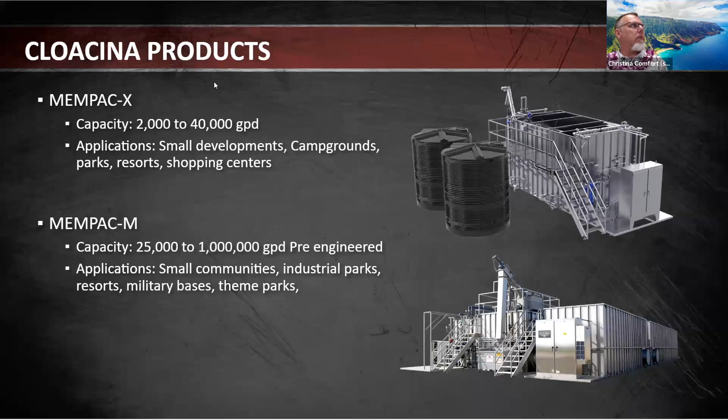We have the MEMPAC R. This is the new rental unit that we're producing now. So you can see it's essentially a single axle, fixed axle frac tank that you see on the side of the road for sediment removal. We've worked with that manufacturer and our engineering team to develop that's a 30,000 gallon per day membrane bioreactor. So you can meet reuse quality out of that unit.

So that's what we're most likely going to be looking for opportunities over here, just because there's need, but we know the process is going to be substantial, and we need to solve a solution ahead of time, and put something in there that doesn't take an enormous capital outlay to get a solution. It would be relatively affordable to get it here and get it up and running. We're looking at about maybe 35,000 a month for that, that's the current estimate about where we're going to land, depending on length of contract.

And we're already into phase 2 of this design, which is a multi-train setup that we hope to get to 150,000 gallons a day, where we can solve some larger problems.

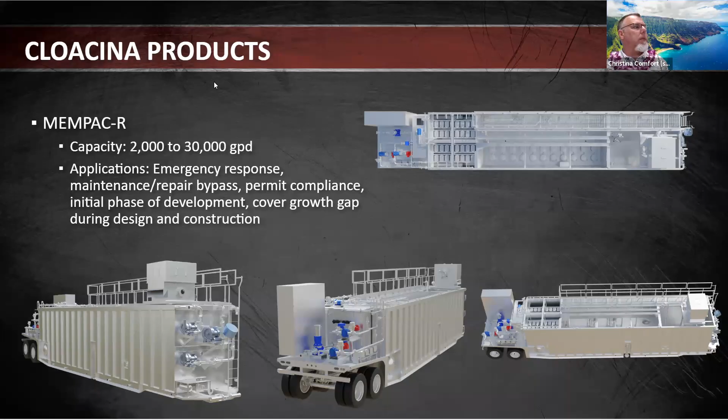Okay, so we're working with... you want to talk about this? Maybe I'll talk about it. Yeah, go ahead, but stay here.

We've been working with the Malaya Village Association for about 3 years now, and this is where you're getting to. This is extremely timely, tragically timely, in that there are 10 condos and there's a commercial center there. They're all on injection wells. I was part of, when I was at Surfrider, part of the Maui, the Lahaina injection wells case. That case went all the way up to the Supreme Court.

And the whole time we were saying we don't want to go to court. There were like 4 environmental organizations, and we said we just want to settle. We just want you to reuse the treated wastewater instead of putting them in injection wells, which we've documented evidence is doing damage to the corals and to the nearshore ecosystem.

Let's reuse the water. And one of our biggest things that we suggested was use it for fire prevention. Have that treated wastewater up there because that whole area is so dry. There's so much dry guinea grass and all kinds of fuel, that we were like, let's reuse this. And so tragically they did not.

But moving forward, for part of this plan that we've been doing in Malaya from the start 3 years ago, we were saying, let's do a model, let's do a system that can be a model for the rest of Hawaii. Decentralized packaged treatment plants that can be shipped in, like the MBR, stainless steel.

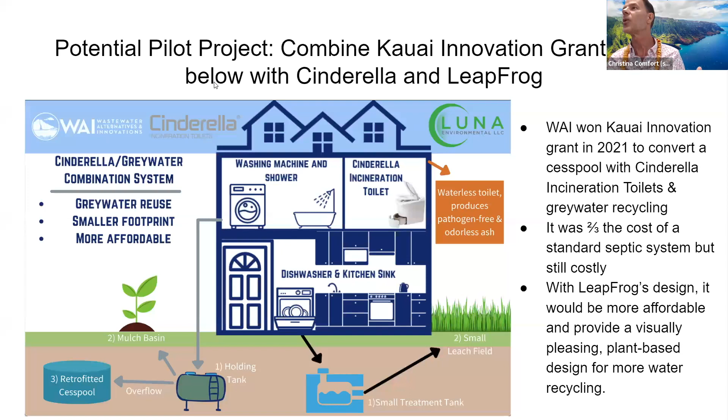They're working, as someone mentioned earlier, on projects in Alabama, and they're donating water efficiency equipment and things. They came with us to Milili'i. If you could raise your hands, Troy and Andrea, you can talk to them as well. They can really help us with some of these projects and help reduce the flow going into them - water efficiency can make a huge difference.

We really appreciate them working with us to provide the sanitation solutions they're doing around the world, and working very community-driven - they're data-driven, they want to know everything about Hawaii. I got to meet Andrea at the Gates Foundation Reinvented Toilet Expo, and have developed these kind of long-term relationships with people I met there. So welcome to our new partners - let's give each of them a round of applause.